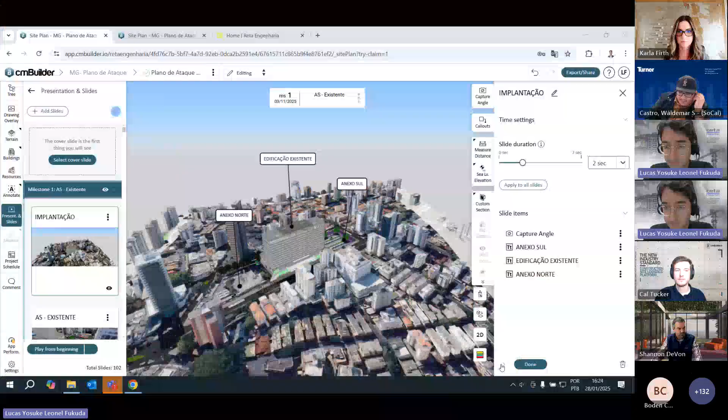So Reta Engenharia is a consultancy company. We deliver solutions from feasibility studies, such as this one that I'm going to present, to full implementation of industrial and corporate projects. So what I'm going to show today is an existing building from one of our clients. It's a public sector client. And we decided to divide it in two different cases because it's two different schedules. Then it would be easier to update the dates.

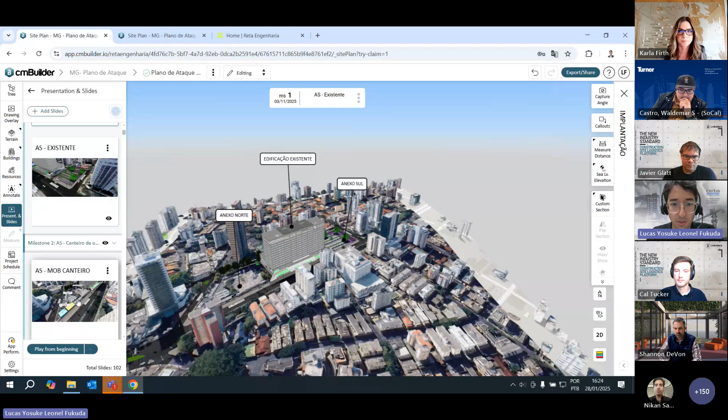So first of all, I'm going to show this south block. I'm not going to pass through all the milestones because it's nearly 150 if you combine both. I'm just going to show what cmBuilder actually helped us to define: where the construction site would be, and all the other installations that will support construction. Unfortunately, my presentation is in Portuguese, so you'll have to believe in what I'm saying here.

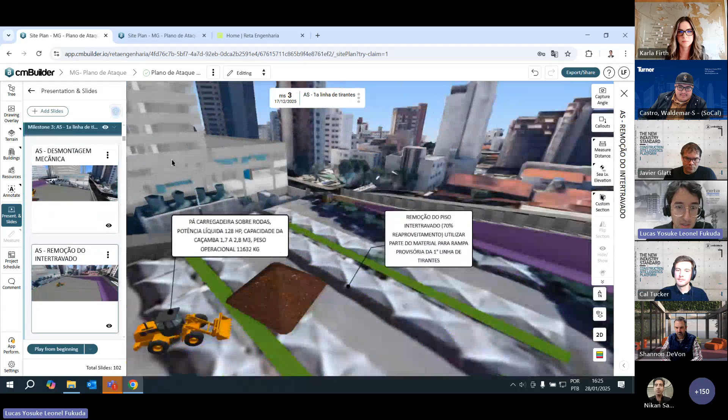The existing building has some structures that we would have to disassemble. So we used a lot of the library from cmBuilder, such as this crane truck, and we explain how we're going to disassemble. This is an interesting part where we should start the demolishing. And we saw that our pile drivers didn't have enough height to do this kind of reinforcement with tiebacks. So we're going to use part of the terrain to give ramps and the necessary elevation for this.

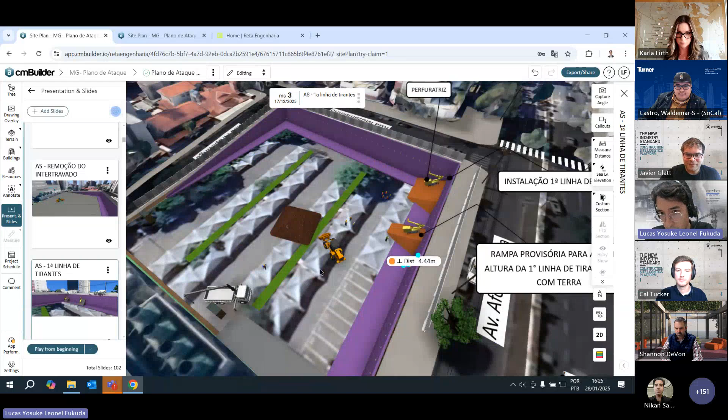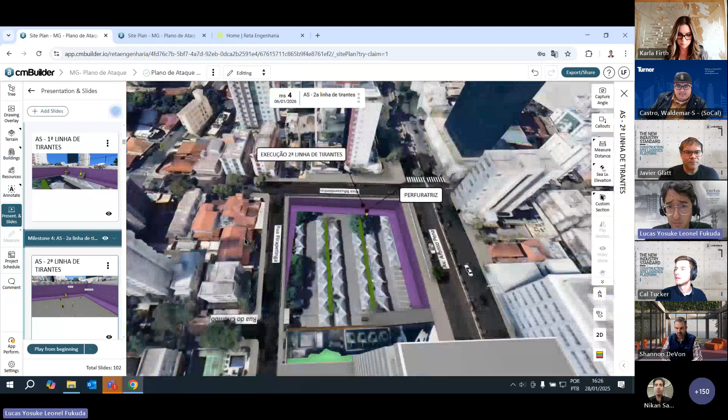On this site, we will have a 14-level building and 6 levels underground. So we have to reinforce this existing wall to be able to excavate. And excavation was the main challenge of this terrain because we are in the center of the city. There will be a lot of logistic complexity involved. So with cmBuilder, we showed how we're going to reinforce the wall and start doing the excavation.

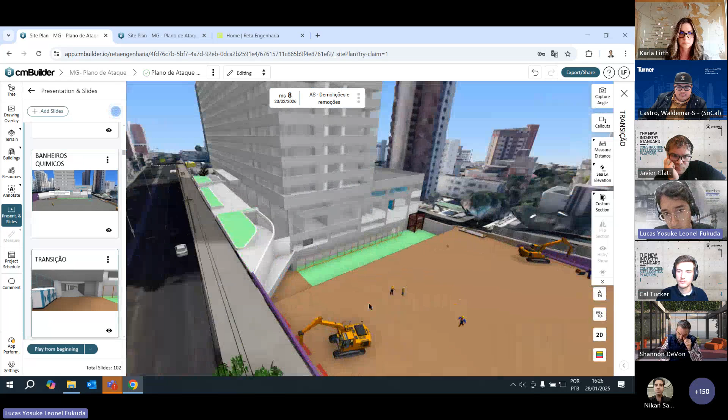And here we're showing how the construction site, which is in the other part of the building, communicates with the construction part. So it's an underground connection. So this is the construction site. And then we start demolition. We're going to use this jackhammer to demolish part of the existing wall. That's why it had to be reinforced prior to this.

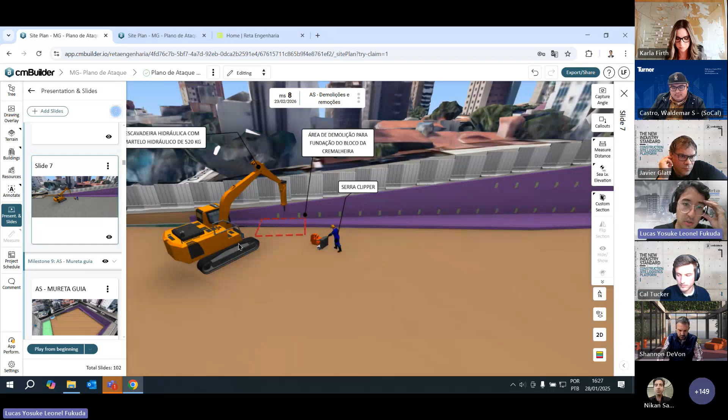And we saw that we also have to think about the cage hoist foundation, where we're going to position it. We're going to use the same equipment, so this is an economic benefit that we saw. So we're starting to locate where the ramp and the main retaining wall are going to be positioned.

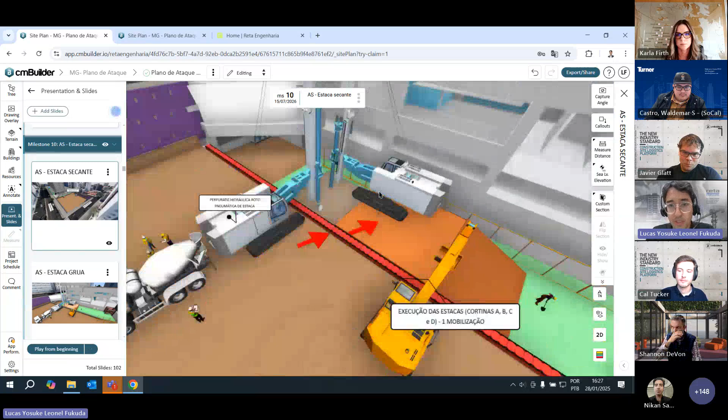Here we saw that we're going to use part of the dirt to make a temporary platform, because here is going to be the foundation of the crane, and the equipment only from this side wouldn't have the total capacity to do all the foundation piles. So this is a temporary solution that we had to anticipate, and cmBuilder helped us. Also, where the concrete pump will be located.

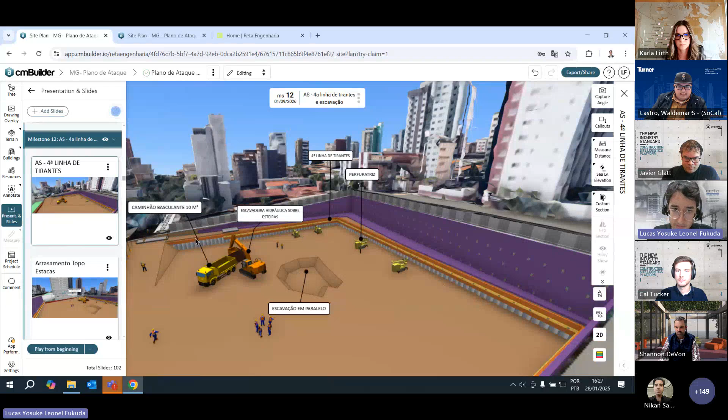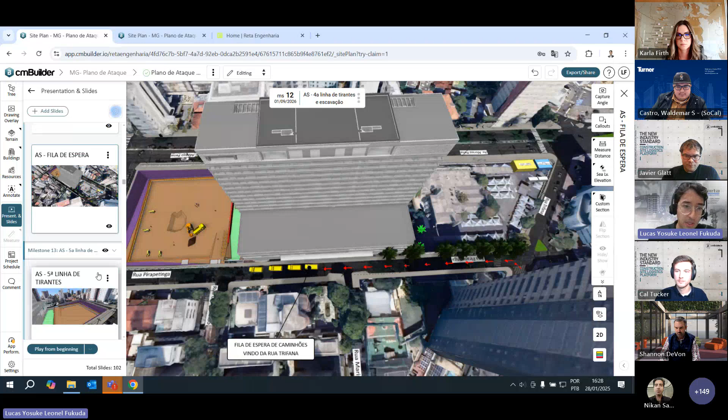So excavation will be a little bit slower because we are conditioned by these pile drivers, these anchored tiebacks. So it can happen faster in the middle, leaving the necessary height for this equipment to make the piles. And we also have these excavators loading the trucks. This will be an 8-month solution, and all the trucks will gather here. So we're showing our client the logistics.

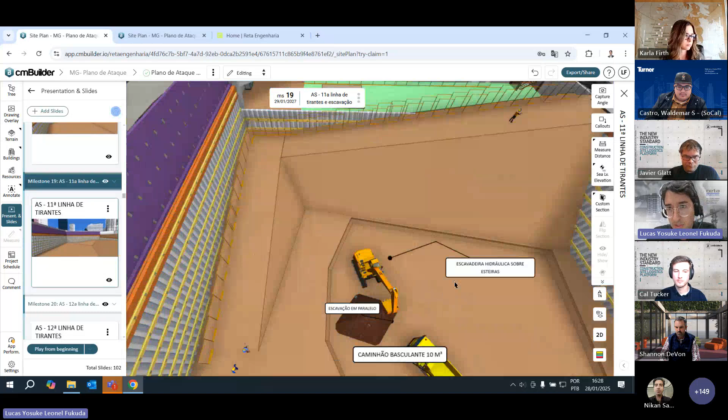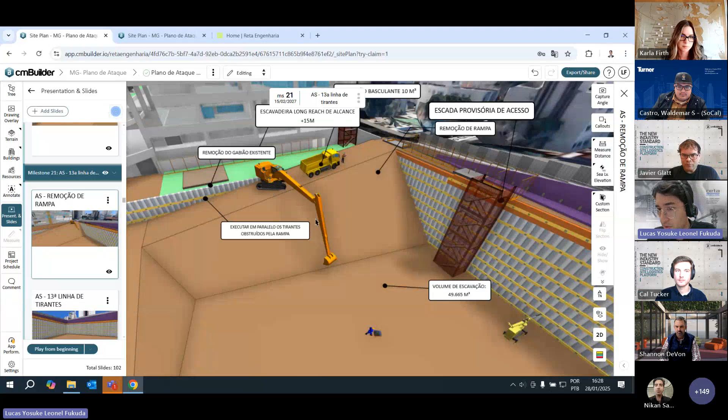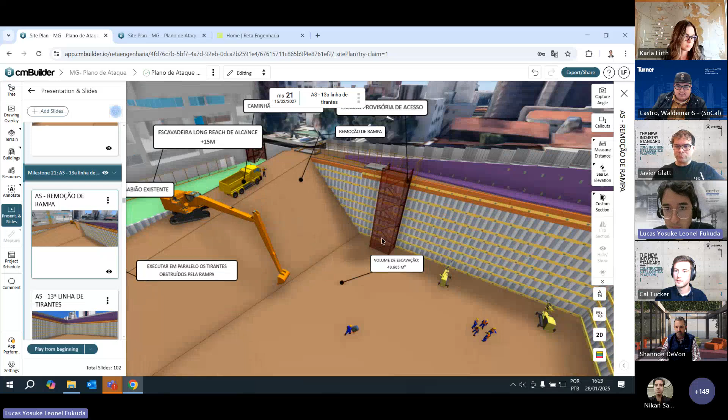And since it's 6 underground levels, this will repeat until here, the 11th line. So this kind of ramp will only get deeper, and we will remove it with this long reach excavator. cmBuilder helped us to choose each of the equipments, and they influence our planning and our budgeting. We saw that when this activity happens, we have to make a temporary access for all the workers because of safety issues.

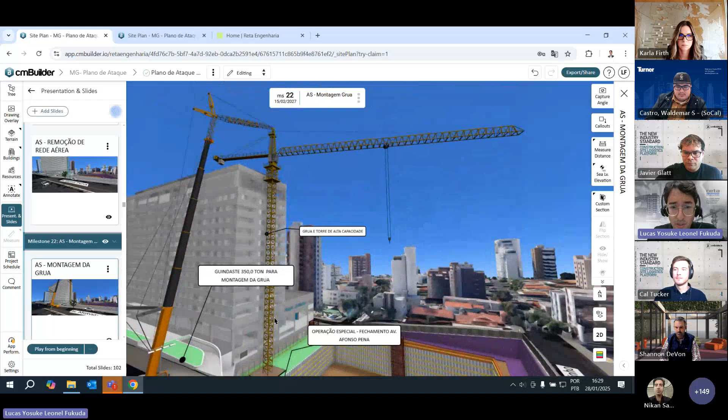And then we're going to assemble the main crane. Here we saw that we have to remove the aerial infrastructure for electricity. And then we have a special kind of crane, which needs to be built 80 meters above ground, above this building, because we don't have enough space to position the crane. So we will have to stop traffic for 2 weekends to assemble this crane using this special mobile crane. And we'll have to remove other equipment that was finalizing some activities underground.

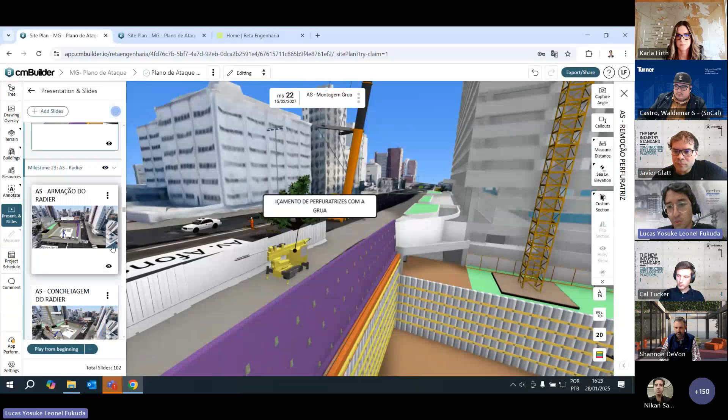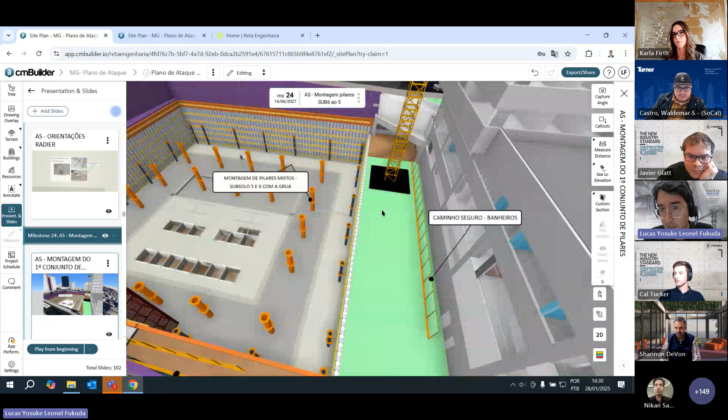So we're starting to pour the concrete for the foundation, and this will repeat for the 6 levels. And this is an interesting case of benefits that we brought to the project, because this crane is a special kind of crane. And this steel column, prior to our study, was 9 meters high. So it was really heavy. We didn't have enough space here to gather all the columns and to assemble them.

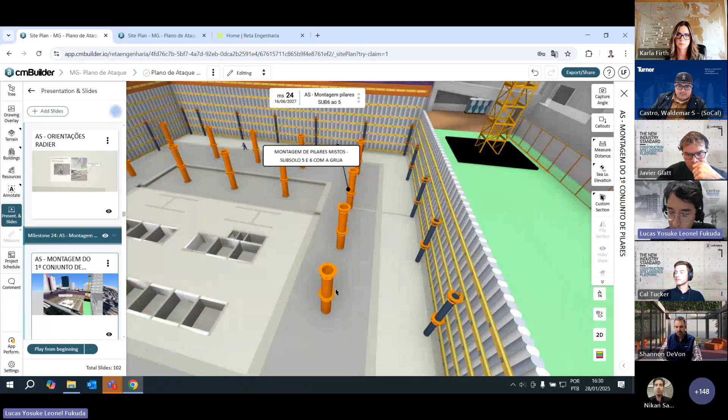We asked for an alteration to the design. So the 9-meter column, which demanded a 12-meter-long truck, which is very complex to move around the city, is now 6 meters high, so it's lighter. And we can also assemble them faster because we changed the welded joint of the columns to a flanged and bolted connection.

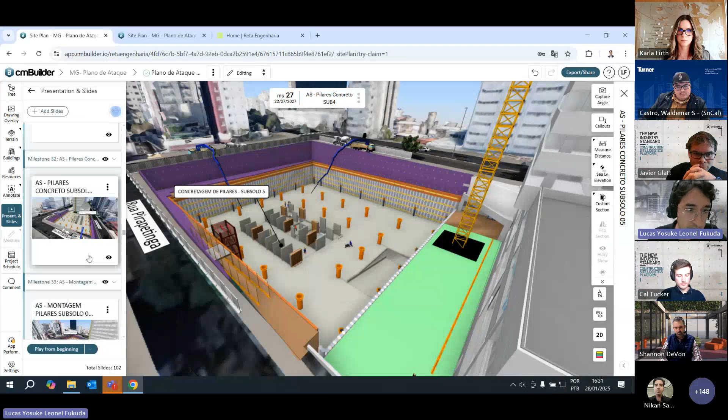So before it was 3 days to complete each floor. Now in 1 day we can assemble the whole floor. So that is a very economical gain in time and budgeting. So this will repeat: the pouring of the concrete of the slab, the positioning of the steel structure, and this will repeat for the 14th level. I'm gonna jump a little bit, because there's a lot of detail that we managed to give to this feasibility study.

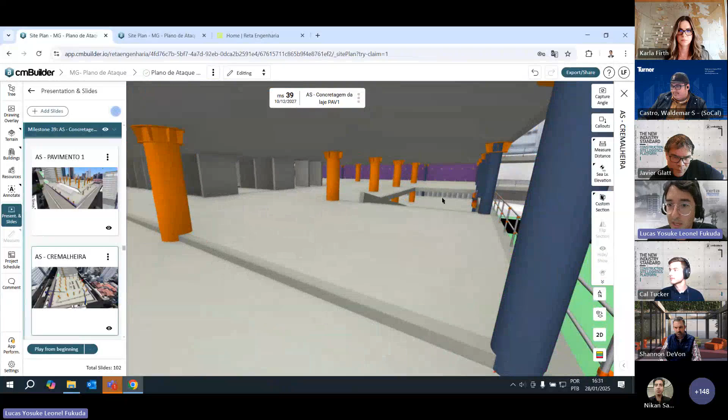One thing that I want to show you guys is the positioning of the cage hoist, because as you see, the building is almost the size of the quarter here, and this was the only place where we have access to the underground. So with bobcats we can transport some materials, and we can use it to the fullest of capacity to transport material to all the levels here.

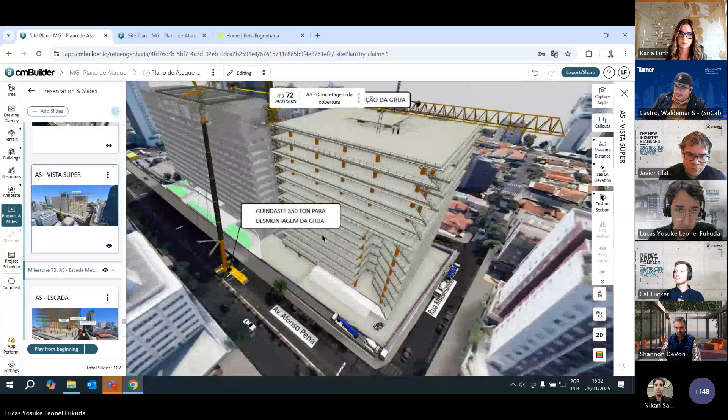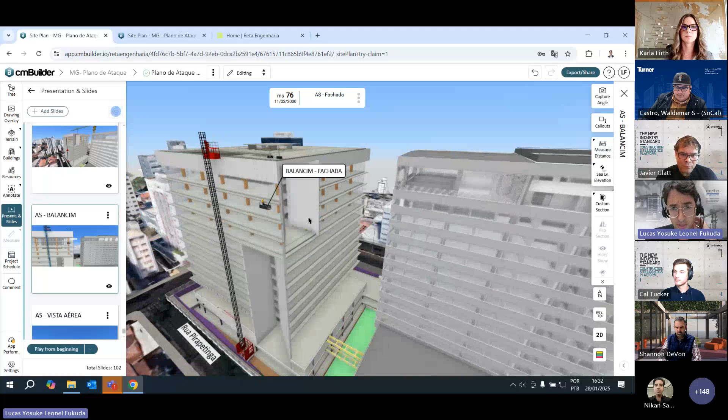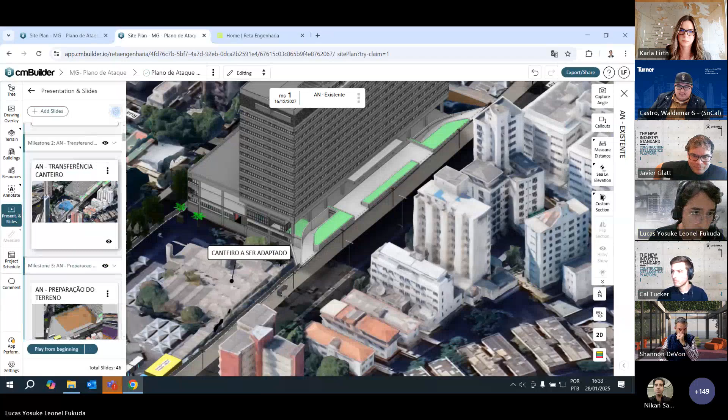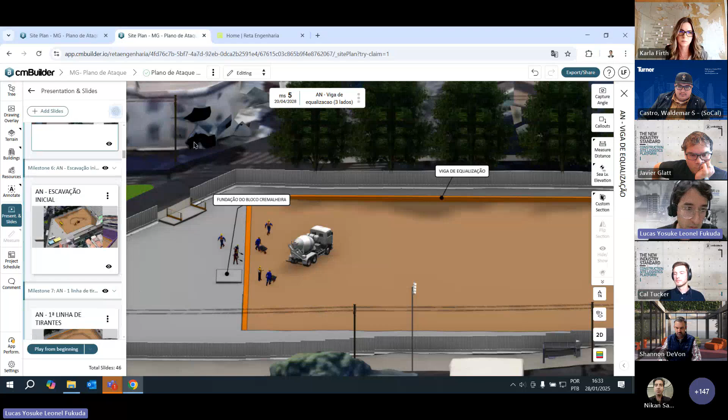We have to prepare the site. We have to drill all the piles. We have to think about the foundation of the cage hoist at this stage so we can optimize the equipment's position. And we're gonna run with the excavation from the middle, leaving heights for the tiebacks here. Here we saw that the terrain has a different level, so we have to mobilize this equipment again. And here we saw that there's another retaining wall that we have to excavate, and this will be a good milestone to think about that.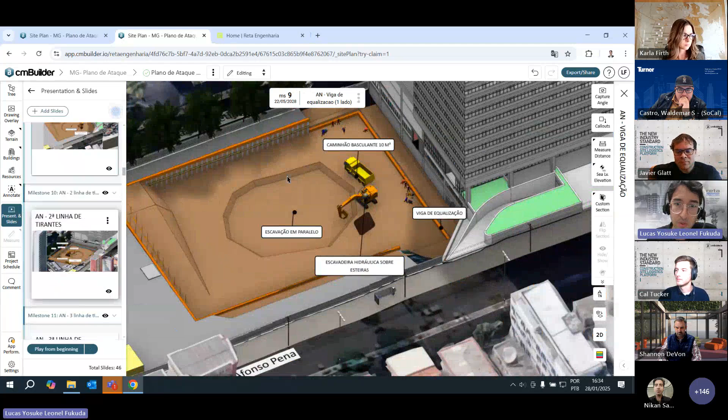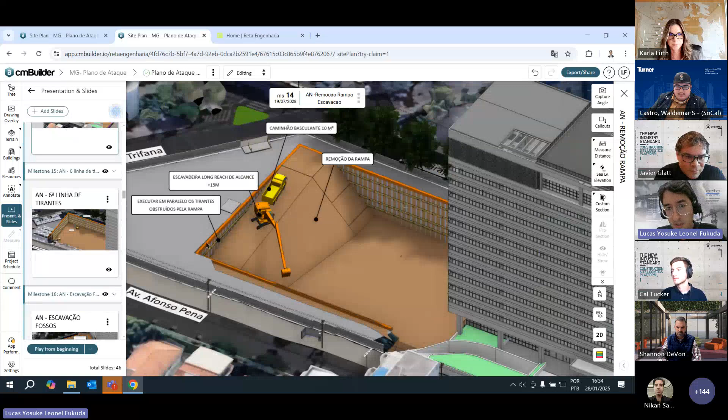So we're gonna pour the concrete from the street, and we're gonna use the excavation with the anchor tiebacks happening combined. There are different companies working together, so if they understand how they can be orchestrated through planning, then we can achieve the goals of the site. So here is 3-level underground. We're gonna use again the long reach to remove this kind of dirt ramp. And then we're gonna also pour the concrete. Here we don't have steel columns, it's more conventional concrete structure.

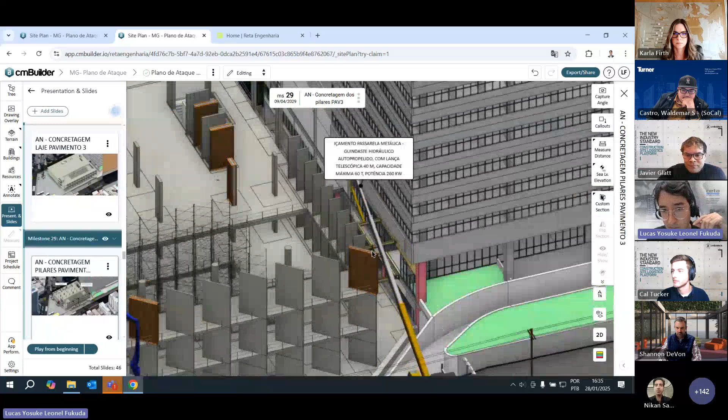We saw in cmBuilder, when we are in the 3rd level, some spatial constraint for the connection here between the existing and the new building. So for example, here is a good time to think about assembling this steel structure. If we wait for the building to reach the tallest part, we won't have space to do this. So it's something that we anticipated using this kind of simulation.

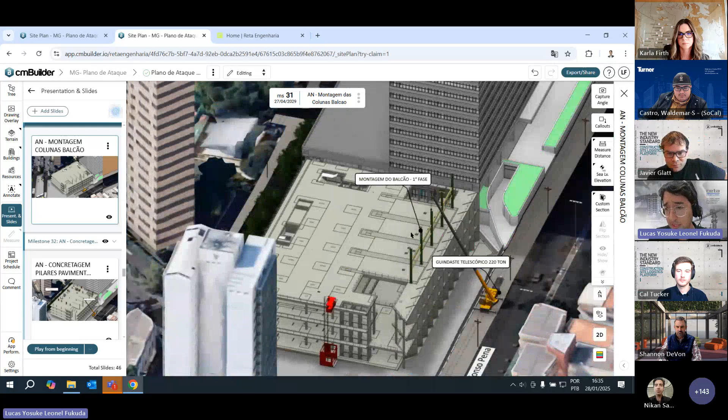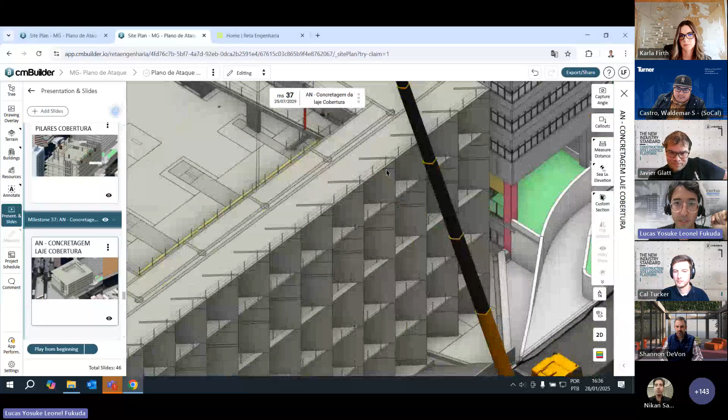And another thing that helped us to think about steel structuring is that on this part of the building, we have a huge auditorium with a capacity of 208 people. And this structure is for an elevated grandstand. So we decided to build it in 2 phases. One, the main structure of it, and only after we pour the concrete of the last slab that I'm gonna show here, we can start assembling the rest of this elevated grandstand, because it's supported by the other levels of the building.

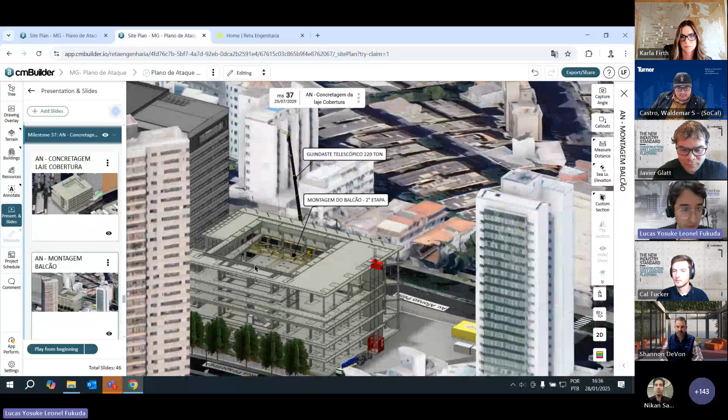It's important because I don't have enough space to store this material on site. So the construction company has to know this, that we should divide it in 2 phases so we don't have issues on site. So this is when I finalized the construction of the elevated grandstand, and I have to pour some concrete on it as well. So we simulated this concrete pump, and also the steel structure of the roof here. So we are actually using 2 positions of this mobile crane.

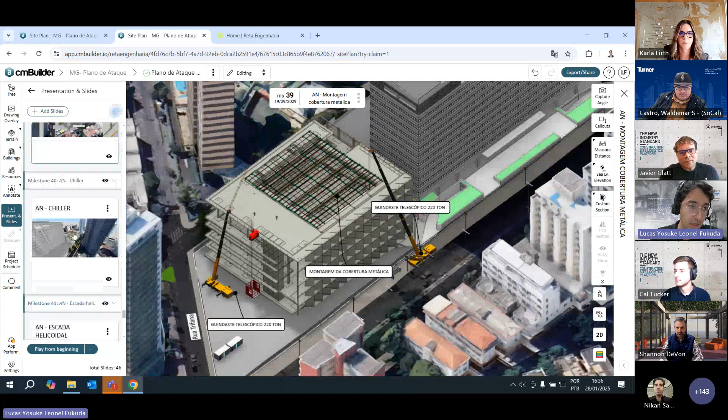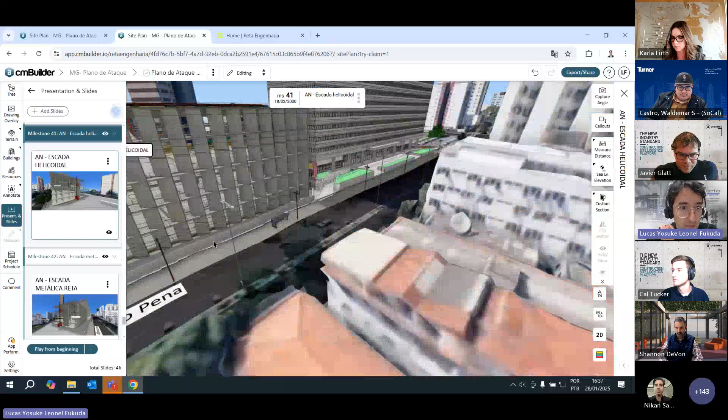And cmBuilder helped us also to see if we could assemble chillers from other parts of the building. And also here, we will use a strategy of combining this crane truck and lifting beams, so we can position this stair, this kind of stair, and the other inside the building. We're gonna use this kind of strategy. And the same strategy for the facade, using the swinging stage for each part of the place.

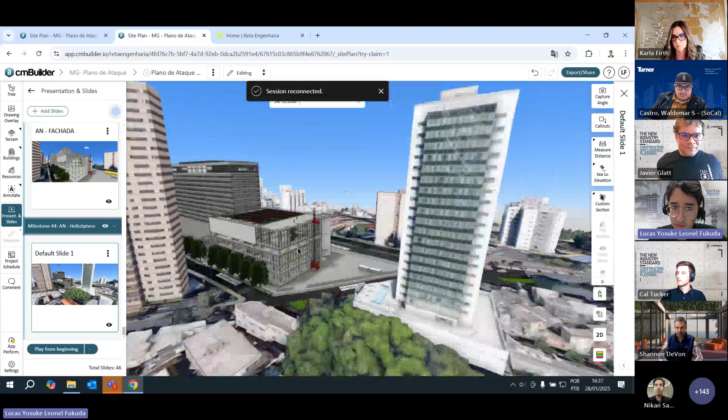So this will be one of the main buildings of our city. If you count, it's 120,000 square meters of construction area. So it's really nice to have a platform that really can help us get the fullest of the details of our planning and our cost estimations, right? So this is what I wanted to show today.

Lucas, that was fantastic. Thank you. You were cooking there. No one wanted to cut you off because you're rolling. That was fantastic, and I know it was one of the biggest jobs in your area.

One question before we dive into Shannon. Lufat asks, did you create the excavation that we showed in Revit or inside cmBuilder? Inside cmBuilder. We didn't have a detailed project for this excavation, so it was fundamental to use this kind of tool to define the logistics of the excavation. Fantastic. That was awesome. Thank you for that.